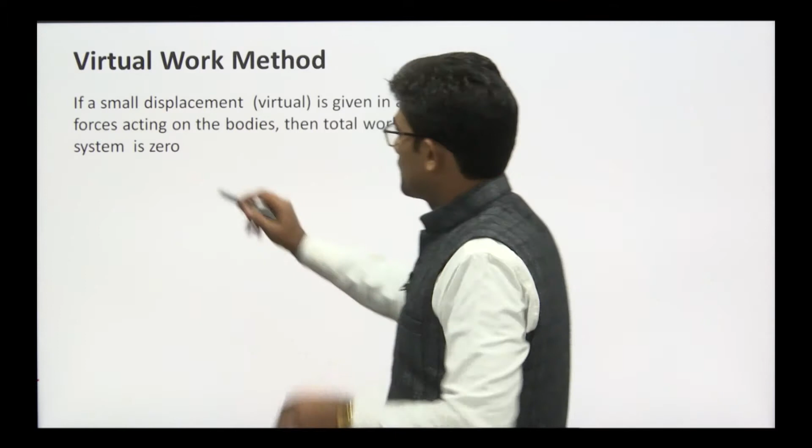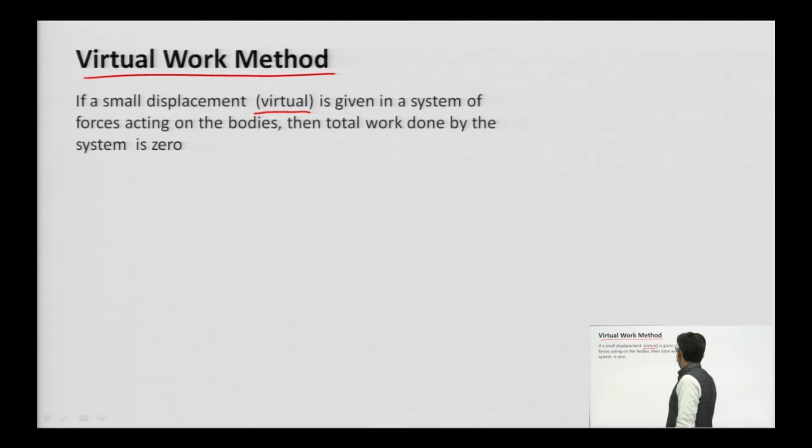So, virtual work method is: if a small displacement in the form of virtual displacement is given in a system of forces acting on the bodies, then the total work done by the system is 0.

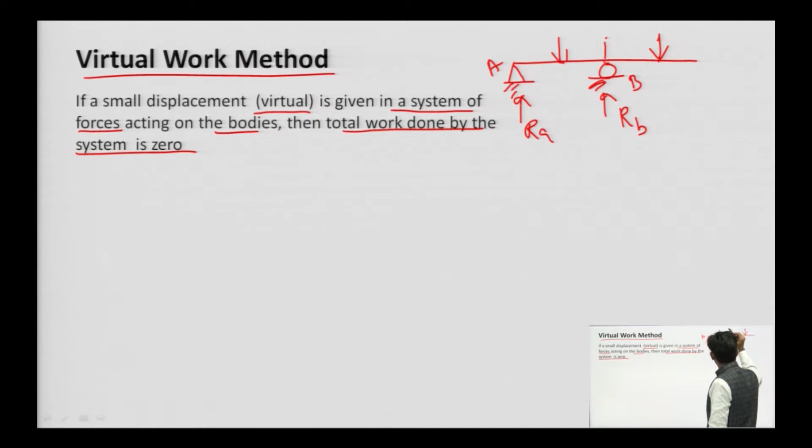Suppose I have a beam, and it is subjected to certain loads. Due to certain loads there will be reactions, say RA and RB. If we apply a certain virtual displacement, say this is point A, this is point B, and I take this virtual displacement like this, then the deflected shape is this.

This is virtual displacement, it is not actually real, but this is virtual. Here a point load is acting, say it is P, and say it is Q.

Say this ordinate is y1, this ordinate is y2, this is RB. So this point is A, this point is B, this point is C, this point is D, and this point is E.

So point force P is acting at point E, force Q is acting at point D. Say this is y3, and B here the roller support is, at A the hinge support is. What is the system of forces? RA, RB, and the point loads P and Q - this is the system of forces.

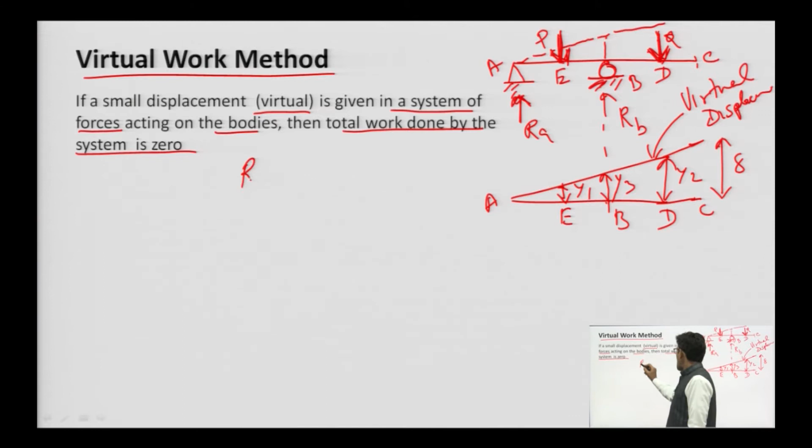If this system is in equilibrium, then the work done by all the forces will be 0 for this virtual displacement. So what we can write is: RA into 0. RA is not going to contribute any work done, because the displacement at this point is 0.

Plus, this force P is acting downward, so it's P minus y1. Since this point load force is acting downwards, the work done contributed by this force will be minus y1.

Next force is the reaction at point B. So plus RB into the ordinate at this point, which is y3, and it is in upward direction, so we take positive sign.

What is the next force? Next force is Q, so plus Q into the ordinate at this point, which is y2. Is there any remaining force? No. So we equate it to 0.

By equating this, we can calculate the value of RB.

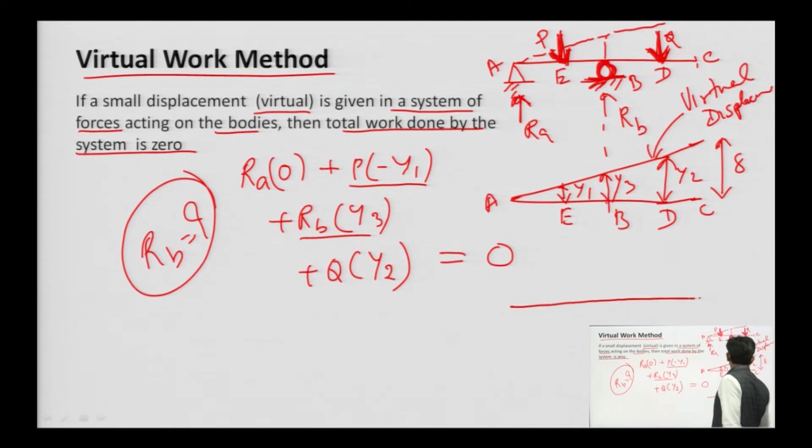Similarly, if the displacement is given by delta at point A, then the deflected shape will be this. Care must be given that while giving the displacement, the geometry should remain the same, meaning it can be rotated at any point - that is possible.

So if we want to give the virtual displacement delta at point A, then this will be the shape. The corresponding ordinate: RA into delta, P into this ordinate whatsoever, and RB into 0, here Q into this ordinate whatsoever - that equals 0, and by doing that we will be able to find the value of RA.

Value of R A can be determined.

So, the equations made by virtual work are sometimes the same as the equations we write using static equilibrium, we get the same result, but different equations can also be written.

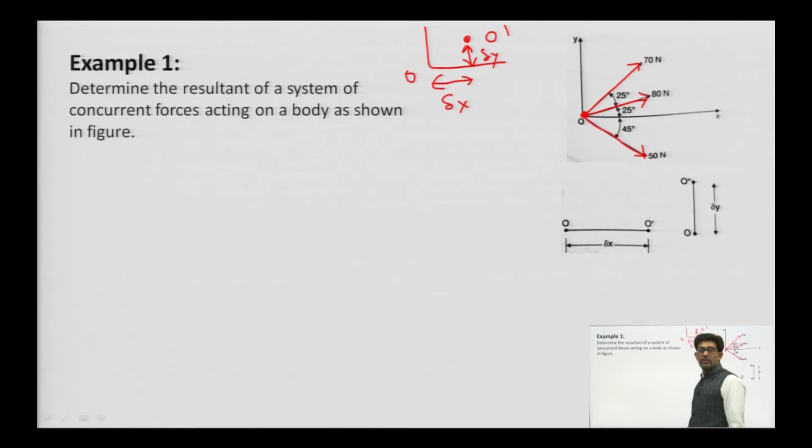Say this is the translation, from O to O dash. So if I am giving virtual displacement del x as horizontal virtual displacement in the x axis, and in vertical say this is del y, as shown here - a horizontal and a vertical displacement.

And you will see that we need only two equations to find the resultant of this force, to find the resultant of the force. So let us do it.

One more thing - in the previous definition, a small displacement given in a system acting on the bodies, the work done by the system is 0.

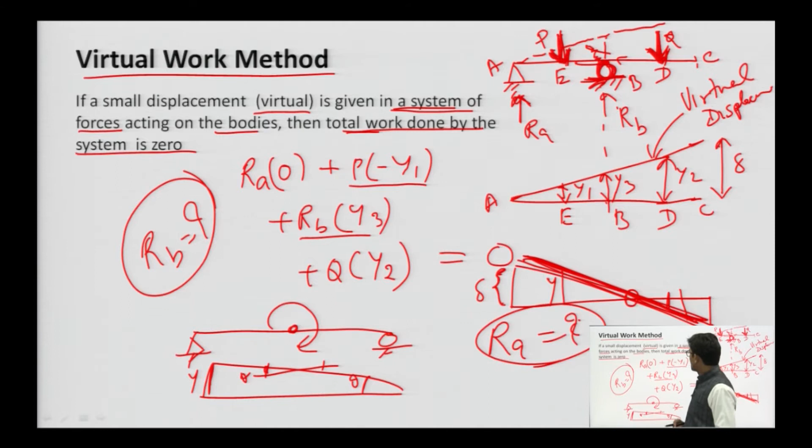It must be in equilibrium, then it will be 0. So how can we make this equilibrium condition? If we have a force component in this direction, then what do we need to do? We need to apply the force in this direction to make the resultant 0. So we will do this here.

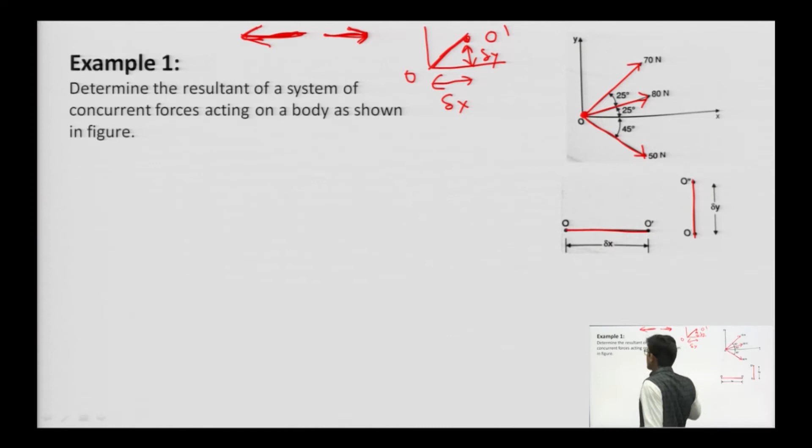Let us do for horizontal translation. For virtual displacement del x, what can we have?

This 50 Newton force is acting, inclined at 45 degrees. So its horizontal component will be 50 cos 45 degrees. It will be in the x positive direction, so positive sign here we have taken, and it will be multiplied by del x, plus the 80 Newton force.

It is inclined at an angle of 25 degrees, so plus 80 into cos 25 into del x, plus - this 70 Newton force is inclined at an angle of 25 plus 25 from horizontal, so its horizontal component will be 70 cos 50 into del x.

Okay, so this is the value.

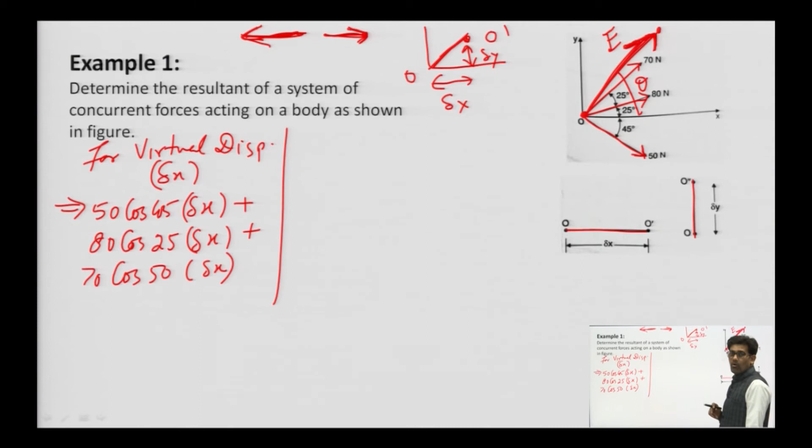Let us apply a virtual force to make this body in equilibrium. Say we have applied this virtual force E, at an angle of certain theta, so that the force acting at the point O turns into equilibrium. To make the system in equilibrium, we applied a force, say E.

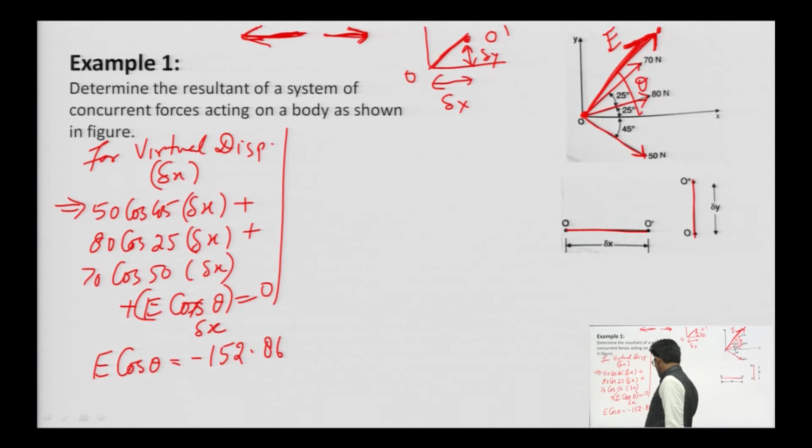So plus we will write E into cos theta, that equals to 0. Therefore, into del x, you can see from here that you can find the value of E cos theta. After calculating, you will get 152.86 Newton.

It will be in minus sign, because all the forces are acting in positive direction. E cos theta - E is the force I am writing here to make the system in equilibrium. You can write F also, no problem. So by doing this, we get the value of E cos theta.

Similarly, for virtual displacement del y, we can write one more equation. So what will be the vertical component? For 50 Newton, it will be 50 into sine 45 into del y, plus vertical component of 80 sine 25 into del y, plus 70 sine 50 into del y. So these are the vertical components, plus E sine theta.

Equals to 0, because the body is in equilibrium. Therefore, value into del y - do not forget to multiply the virtual displacement. So value of E sin theta can be calculated, and after solving you will get 52.07 Newton.

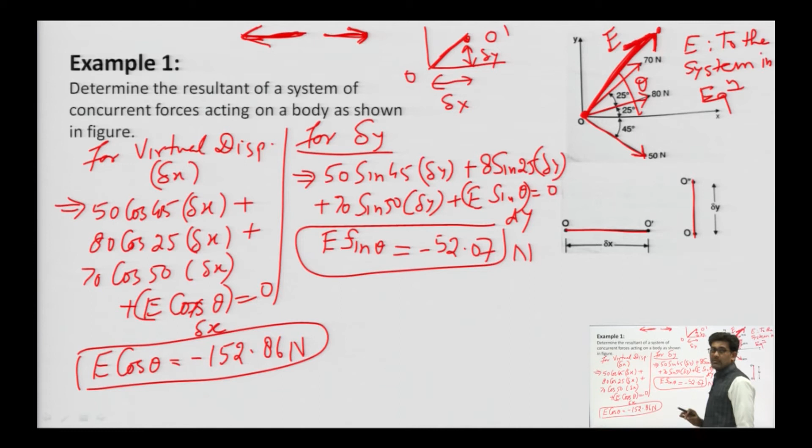So this result will give you the resultant. From here, look - if we will apply the force E in this direction, is it possible to make this force in equilibrium? No, why? Because it is in this direction, therefore that is why in opposite direction. So F component, F cos theta, in spite of having x direction, it should be in negative x direction, and y component in negative direction. Therefore, if R is the resultant...

If R is the resultant, then R will be equal to - if this is E, then this will be the R. Therefore, R cos theta will be 152.86 Newton, and R sin theta will be 52.07 Newton. Now you can calculate the value of R. So resultant will be this R and this theta.

You can calculate both the values. So R, you will get after calculation, 161.48 Newton, and value of theta is coming as 18.81 degree from x, that you can calculate using virtual work method.

Let us do one more example.

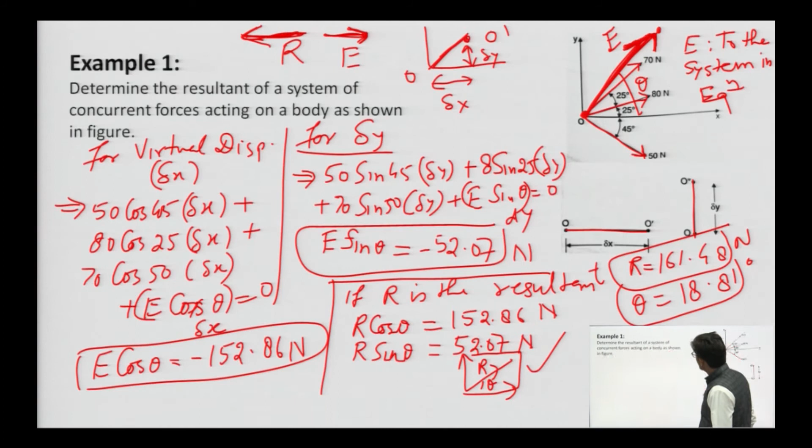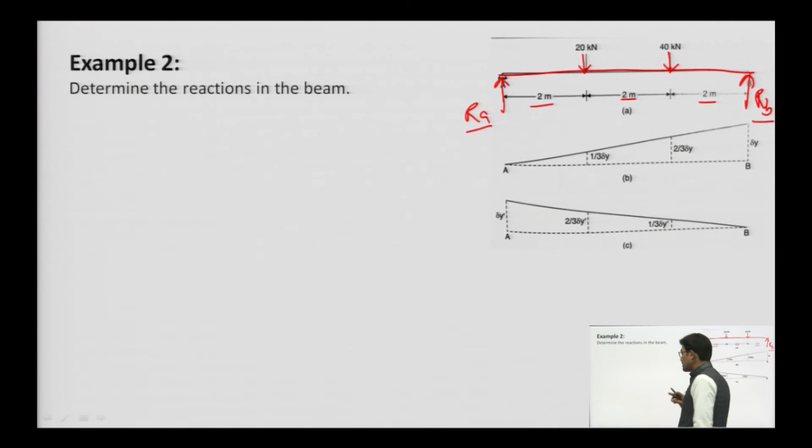Two unknowns are here, R A and R B. Therefore, we need to give two virtual displacements. So let us provide the virtual displacement at point B.

If it is del y, then the component of this under the loads of 20 kilonewton and 40 kilonewton can be calculated by linear interpolation. Similarly, if we give the displacement del y dash, then the component can be calculated.

For both we will have two equations. We can write two equations for work done, since this system is in equilibrium. So the work done by this virtual displacement will be zero.

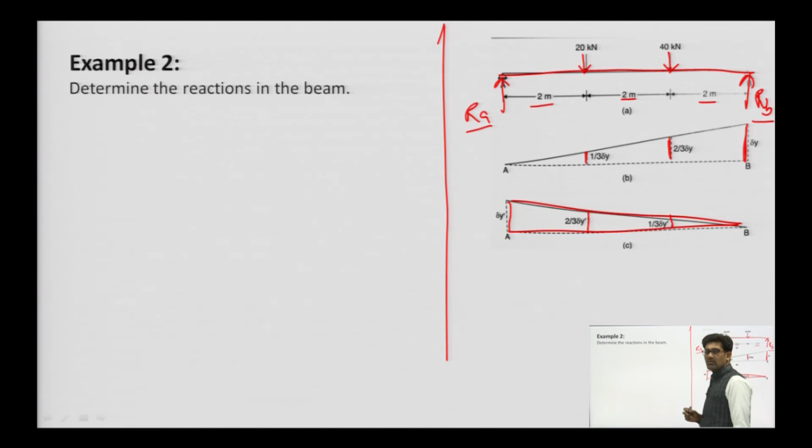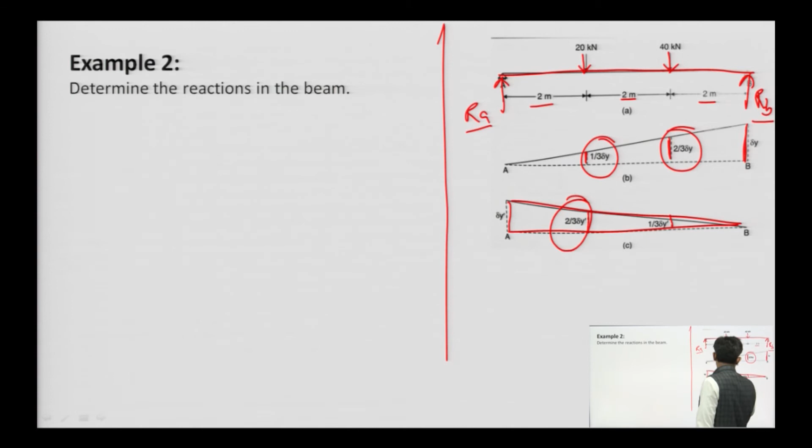You see here, first the displacement under the point load shown here can be calculated by linear interpolation. Del y by total 6 equals this distance divided by 4, and this distance divided by 2. So you can calculate the value of that ordinate.

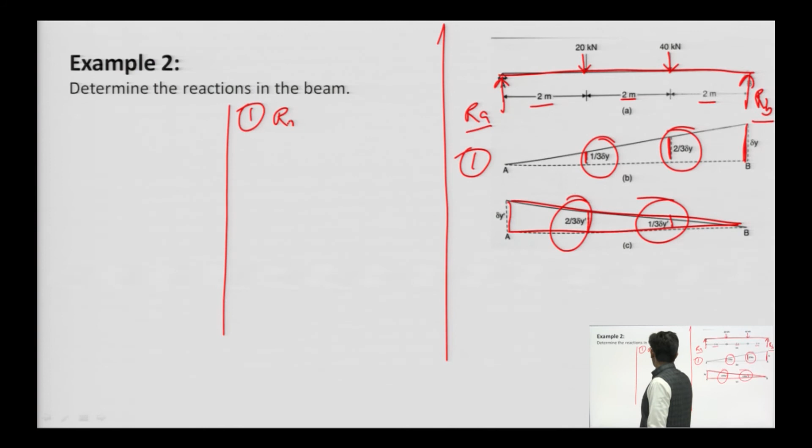Let me make the equations for case 1, for this virtual displacement. The displacement at point A is 0, so R A into 0.

Plus 20 into the vertical displacement, since it is acting downward we put minus 1/3 del y. And another force, 40, with displacement upward while the force acts downward, so again minus 2/3 del y.

Another force R B acts in the upward direction, and the virtual displacement is also given in the upward direction, so plus R B into del y equals 0. No other force is acting in this system, so we equate it to zero. The value of R B can be calculated easily once del y cancels out.

The value of R B coming out after calculation is 33.33 kilonewton. Similarly, writing the virtual work equations for case 2.

So what will we get? We will get R A into del y dash. For case 2 this is R A into del y dash, plus 20 times the ordinate 2/3, so minus 2/3 del y dash.

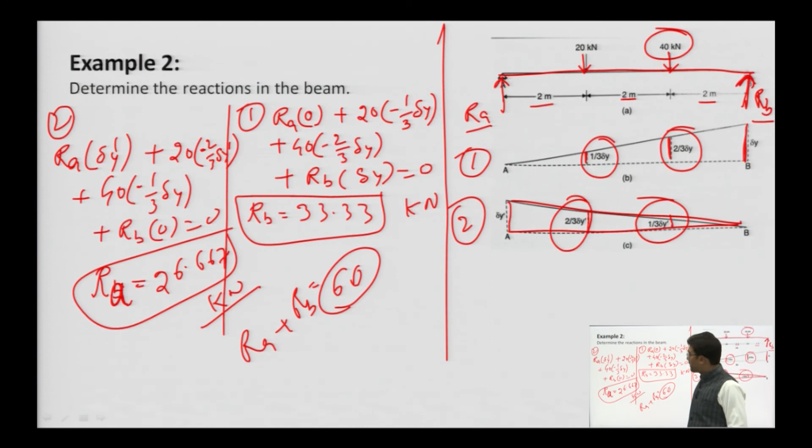So this is the virtual work method by which we can calculate the parameters. In this example, how many parameters do we need to find? We need to find two parameters, R A and R B.

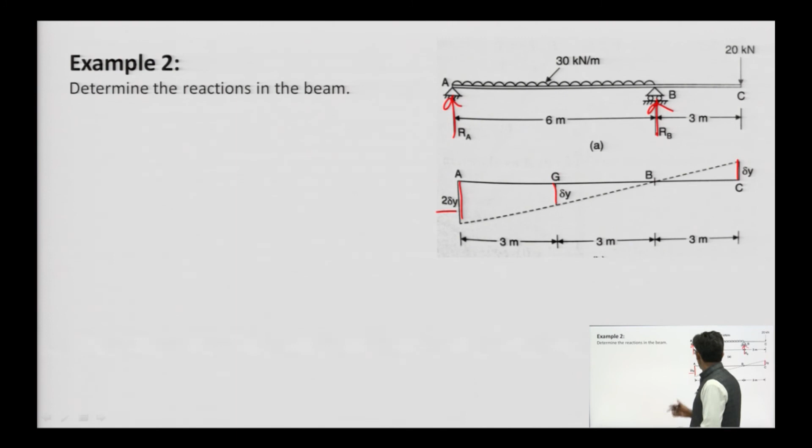And which one reaction will we be able to find from this virtual displacement, okay. It is very obvious that we cannot calculate the value of R b, we can calculate the value of R a, because we do not have any virtual displacement at this point. And one more thing: by providing this virtual displacement, the geometry of the beam remains the same, it does not alter.

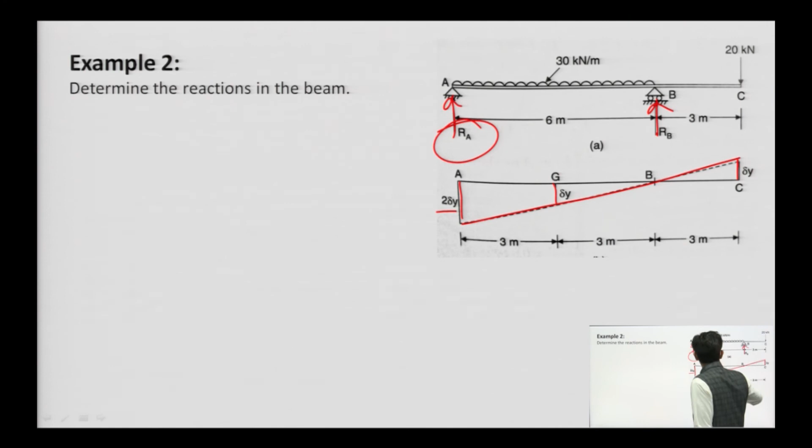So by applying this we can write R a times 2 del y. As per this sign convention it will be minus, so put it as minus plus.

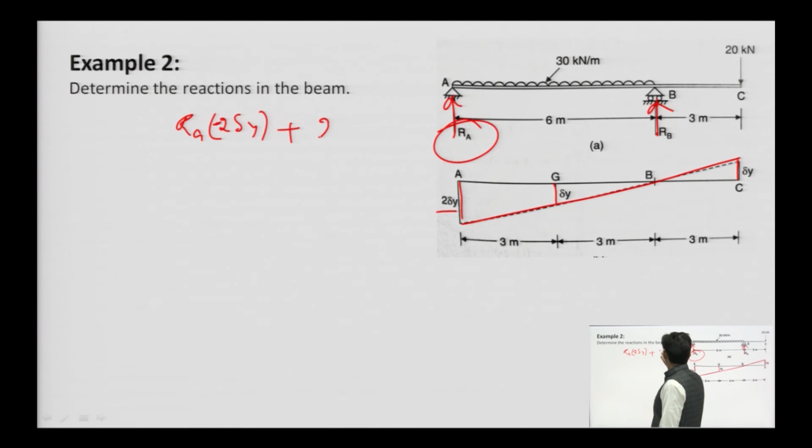Here it is UDL, UDL it is 30 into 6, it is the point load, and this point load is acting at the midpoint. So the work done by this equivalent point load will be 180 times del y, and it will be plus here because it is acting downward and displacement is also downward, so it is minus means positive.

R b is not going to take any part, so R b into 0, plus 20 into del y, minus sign will be taken. So the value of R a can be calculated very easily, and its value is 80 kilonewton.

Its value is 80 kilonewton, without using any equilibrium equations. So if you want to calculate the value of R b, then what type of virtual displacement can you provide? Say this is delta, find the ordinates, then write the equation, and calculate the value.

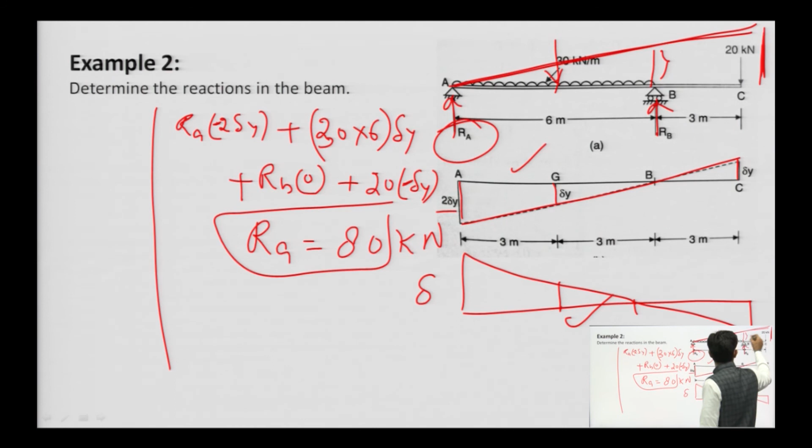So find the ordinate, say this is any certain distance, certain virtual displacement. So find the value of the ordinate here, here it is 0. So the value of R B can be calculated.

At the last here it is a hinge, and we need to calculate the support reaction, this one, this one 3. So it is determinate, actually it is determinate, because 3 unknowns are here and 1 internal hinge is here.

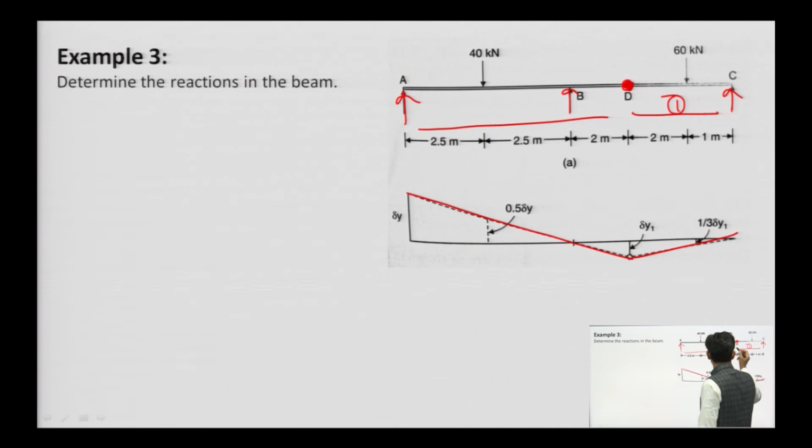So the virtual displacement can be given in this manner, because this is part 1, this is part 1, and this is part 2 type of thing. So internal hinge, you know very well, is like this type of thing. When you apply the load, then it will move in this manner.

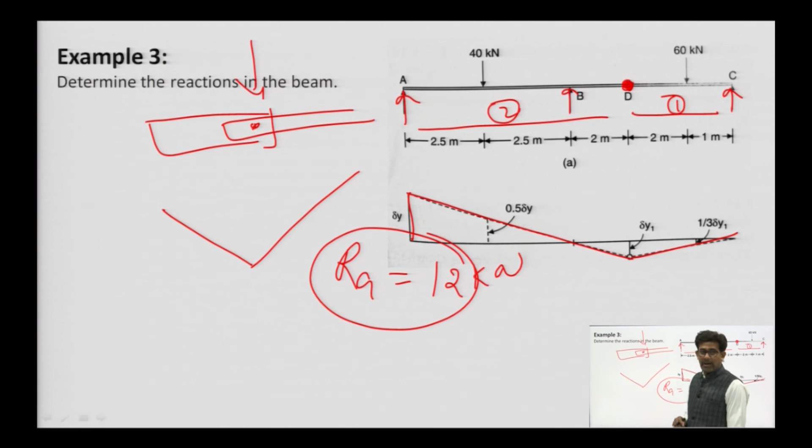So this virtual displacement you can give by del y applied. So from here you can calculate the value of R A, and after calculation it will be 12 kilonewton. So this is the method how you can calculate the value of any parameter.

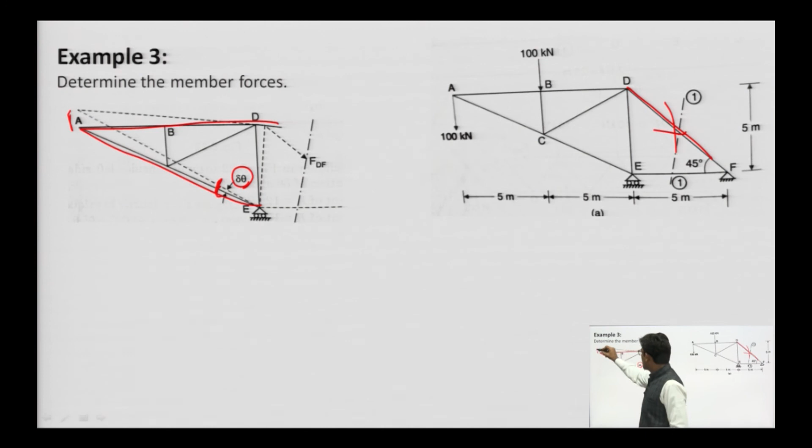So in truss you can also apply this, what if the force in this member is required, then what we need to do is give a certain displacement del theta, and due to that find the forces and write the work done equation to calculate the values.